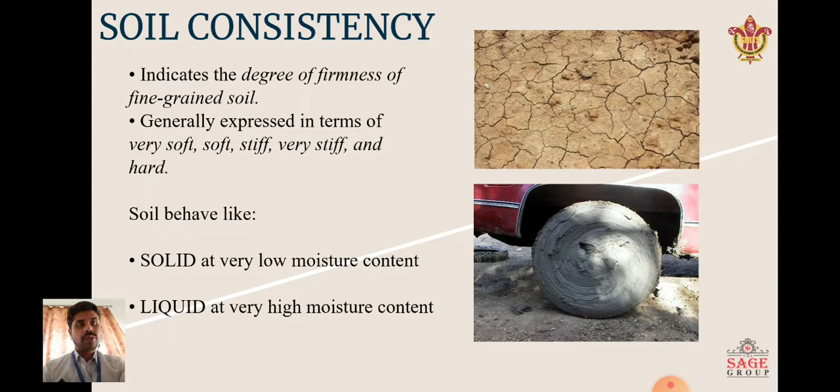For understanding consistency, Atterberg has given some consistency limits which define the consistency of soil very precisely. If we plot a graph between volume of soil and moisture content, and we add water into the soil, then we can see the soil will behave like a solid while the volume remains the same and the moisture content is increasing.

But at some point, at the shrinkage limit, the volume of the soil will also increase as we increase the moisture, and it will gradually increase to a level.

Basically, we can categorize soil into four types according to the moisture content. The first one is solid, the second one is semi-solid, the third one is plastic, the fourth one is viscous liquid. In the solid part, the volume will not increase when we increase the water content, but when it becomes semi-solid, the volume will also increase as we increase the water content.

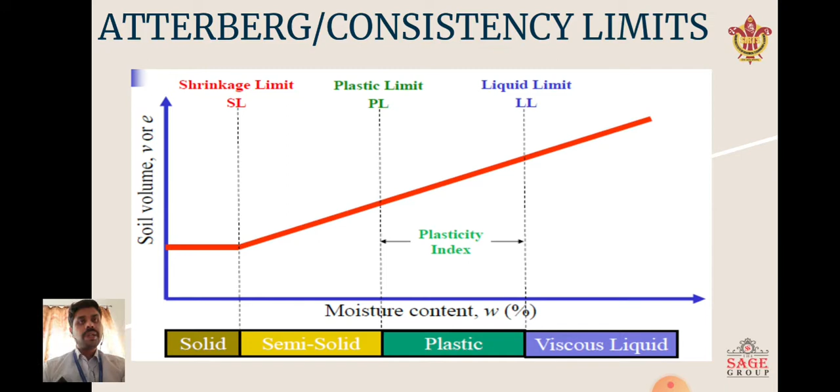So what is liquid limit? The denomination for liquid limit is LL or WL. Liquid limit is defined as the moisture content at which soil begins to behave as a liquid material and begins to flow. Basically, if we increase the moisture content in the soil and it behaves like a liquid material, or it starts flowing, then we can say the soil has reached its liquid limit.

The liquid limit of fine-grained soil gives the moisture content at which the shear strength of the soil is approximately 2.5 kN per meter square.

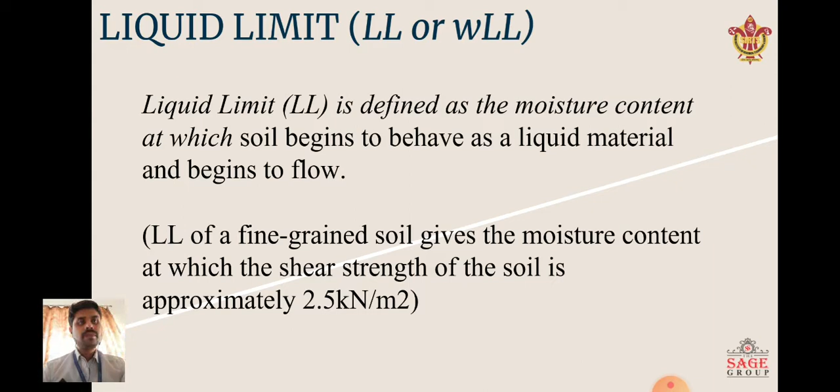Then we cut that soil sample with a grooving tool, and when we move this bowl in the instrument, you can see it starts to join together. At the point when it joins, we note the reading, and we can get the liquid limit of the soil.

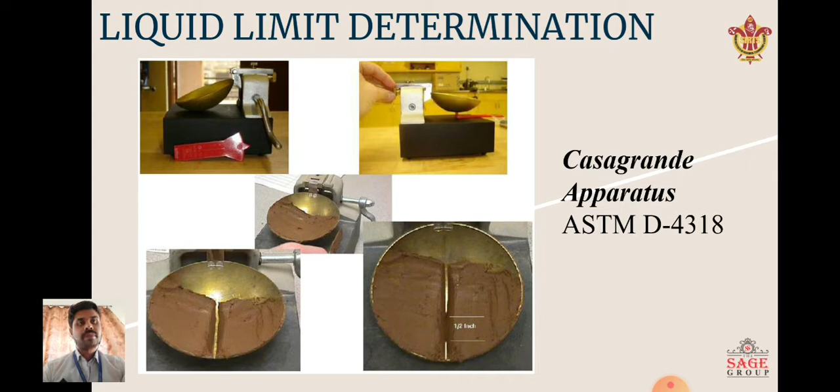In liquid limit determination, there is the first method, which is known as the 3-point method, in which liquid limit is the moisture content required to close a 2 mm wide groove in a soil pat a distance of 12.7 mm along the bottom of the groove after 25 blows. So we start the instrument and we start the blows. After 25 blows, we see this part which gets joined together, and determine the liquid limit of that soil.

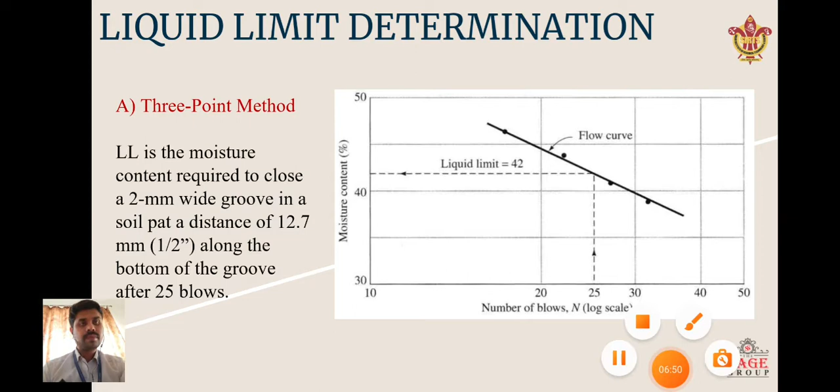Limitations of this method: tan beta is an empirical coefficient, so it is not always 0.121. Good results can be obtained only for blow numbers between 20 to 30. So if you want to get the actual or precise value, then you have to take blows between 20 to 30. And as also discussed, the empirical coefficient tan beta is not always the same.

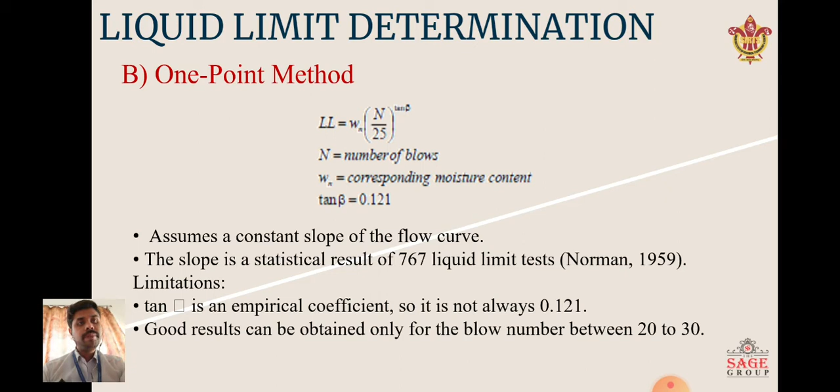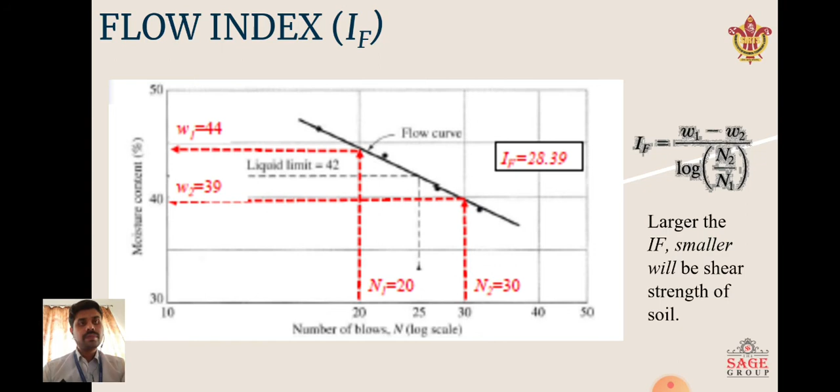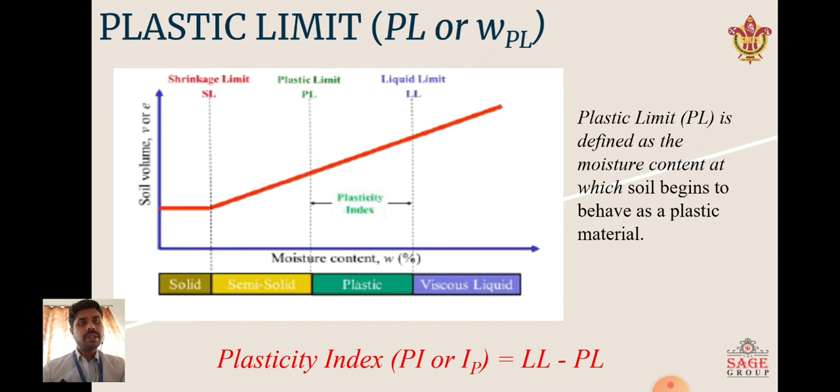Now, what is plastic limit? Plastic limit is defined as the moisture content at which soil begins to behave as a plastic material. So, plasticity index can be known by liquid limit minus plastic limit. The graph is the same as we discussed in previous slides. Determination of plastic limit is the moisture content at which the soil rolled into threads of 3.2 mm in diameter will crumble, where PL is equal to water percentage at 3.2 mm diameter.

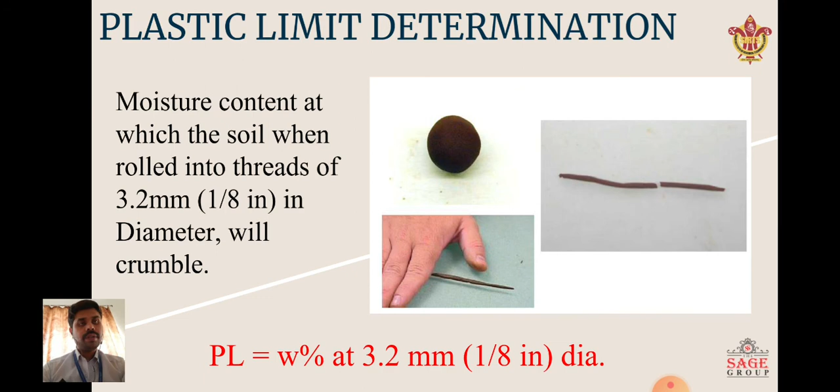The last is shrinkage limit. Shrinkage limit is defined as the moisture content at which no further volume change occurs with further reduction in moisture content. So shrinkage limit is equal to Wi percentage minus delta W percentage.

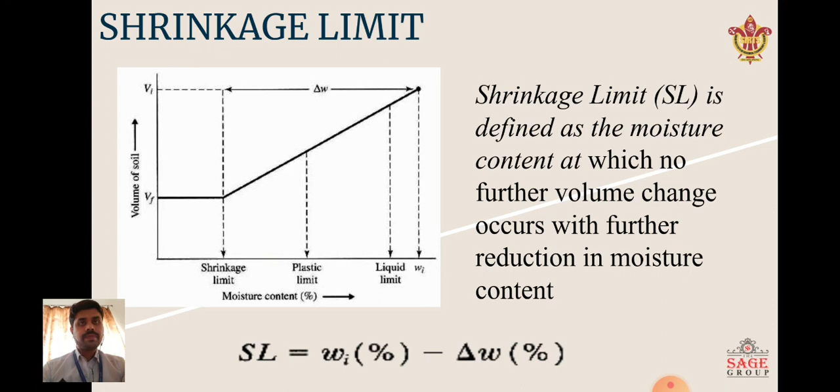Shrinkage limit can also be determined by the formula SL is equal to Wi percentage minus delta W percentage, in which Wi percentage is equal to (M1 minus M2) upon M2 into 100, and delta W percentage is equal to (Vi minus Vf) rho W upon M2 into 100. So if we put both values of Wi and delta W, then we can get the shrinkage limit.